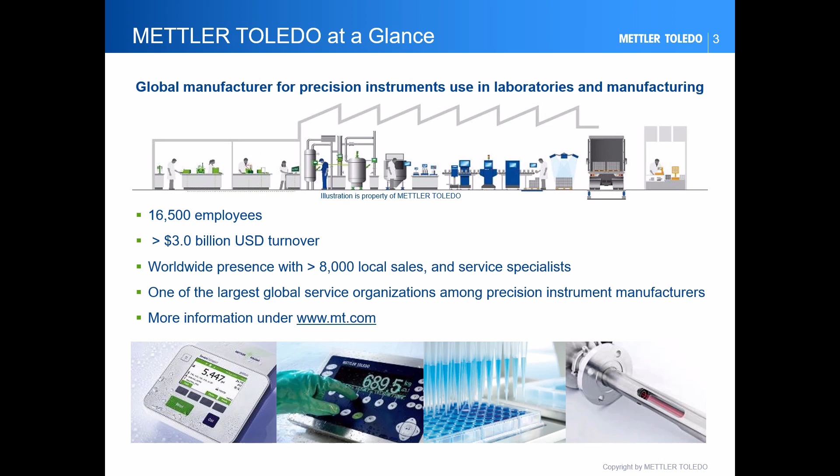In the traditional SCADA automation pyramid, data is consistently forwarded in a systematic step-by-step process following the hierarchy. Communication is via networks such as Profinet and Ethernet IP, but realistically also serial point-to-point connections such as RS-232 or even 4 to 20 milliamperes.

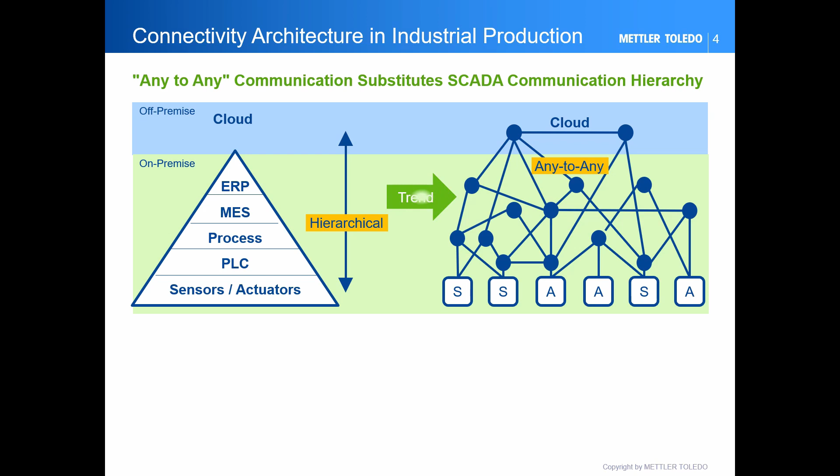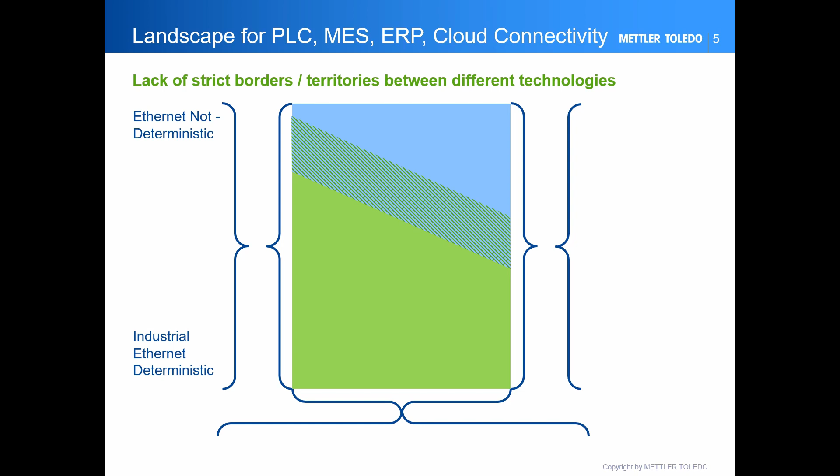On this graphic, you can see the distribution of the communication technologies. On the vertical axis, you see Ethernet not deterministic, and at the bottom, industrial Ethernet deterministic. On the horizontal axis, you see small data volume time critical, and on the right, large data volume non-time critical. On the right-hand side vertical axis, on top is MES ERP cloud, in the middle machine-to-machine control, and at the bottom sensor to machine and sensor to sensor, sensor to actuator.

The blue field here illustrates the territory of OPC UA and MQTT. The green surface here illustrates the territory of Profinet, Ethernet IP and other such technologies. In the middle, we have the mixed zone. In the mixed zones, both technology groups are being used. And who uses what depends on the industry, on the customers, and on the applications.

Here is the same graphic again. So, what kind of evolution can we expect? We will receive Ethernet time-sensitive networking. We will receive OPC UA PubSub. We will receive OPC UA field-level communication. And it will become common that multiple communication technologies share one network wire.

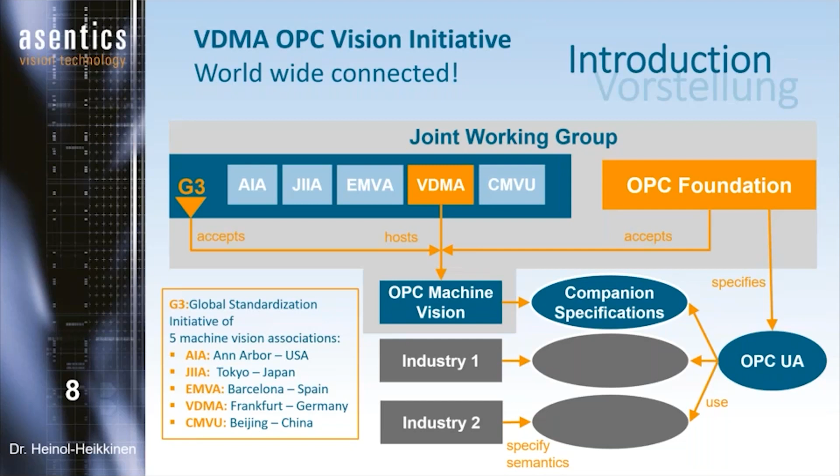And so they provide also information at all 3 continents. This is the reason we call it the G3, because we are talking about not 5 associations, but about 3 continents. So this is very special, and this is very helpful, because this is really a global standardization process, what we are doing there.

Maybe it could be an application with more than one computer, maybe 2 or 3, and 10 or 15 cameras. And this is also what we call a machine vision system. How to standardize that? So we have to find a way when we design our companion specifications to bring a standard for all those systems, not to have 4 different standards, to have one standard. So to have a generic description of a machine vision system.

Besides that, we have another problem. This is that we have enormous application variety. As you know, maybe some of you have had already contact with machine vision systems, and you know there are myriads of applications. So we have lots of different configurations, different results, and so on. It makes life not so easy if you talk about standardization.

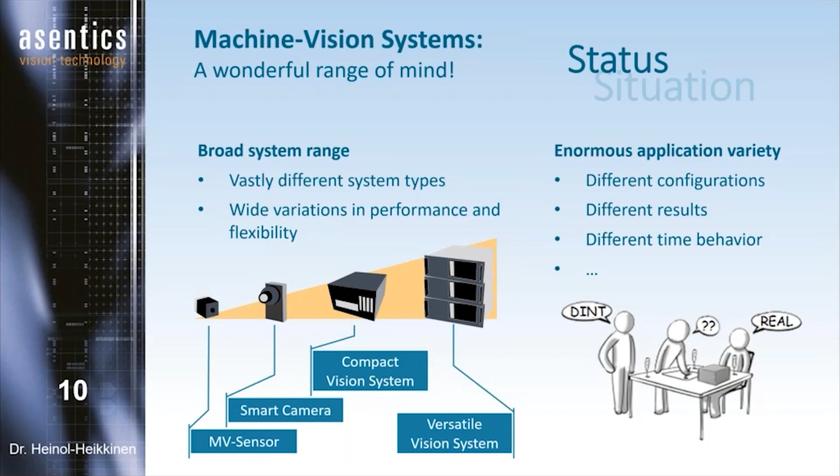But however, we bring out OPC companion specifications in 2 parts. So we started 2017 with the first part of our machine vision companion specification. It's called 40101. And what we did there is we standardized data management methods. That means we talk about how to deal with configuration, how to deal with recipes and results, and so on. But we standardize only the management methods, not the content. The content we standardized later on in part 2.

But in part 1, we also have a standard so-called state machine. That means we have a look at all those different kinds of machine vision systems at the behaviors, and the behavior control and the observation is standardized in a state machine, which you can use for a simple sensor and also for a huge machine vision system. So this is a very generic description of how a machine vision system behaves.

In part 2, we additionally describe a so-called asset model. That means a machine vision system is a computer, it's a light, and so on, and all those components are described. And also we say something about condition monitoring. So part 2 will be ready this year, 2021. I think in autumn we will reach the end of part 2. And of course, part 3 will come after part 2, that's for sure.

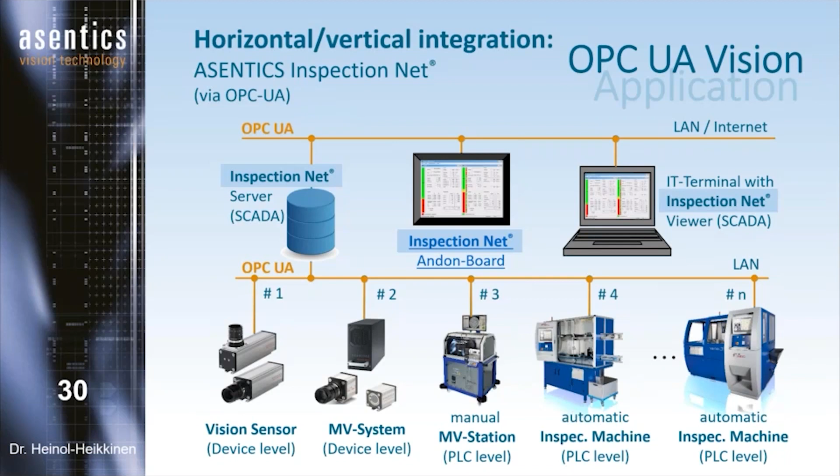And on the next slides, maybe this is also something you know already, but I would like to show that because it's very important for me to point out that even if you are not using a companion specification which is standardized by many other partners, you can, as we did, based on the OPC UA meta model, design your own OPC UA extensions. You can see that here in blue color.

So these are the Asentics extensions, because we have so much information from our machinery. And a standard machinery companion specification is not yet available. VDMA is working on that, but Asentics needed that already in the past, because it doesn't help so much if we have only communication based on a companion specification for all our machine vision sensors. We also need an extended communication level for the machine, because we have so much information about the health of the machine, the state of the machine, and so on. And you will find that on this slide.

And please keep in mind, this is very important, you still work with a standard because you're still working with OPC UA. And if VDMA delivers maybe in 1 or 2 years a companion specification for machinery, you can easily exchange your vendor-specific thing with the standard thing. So it's always allowed to do that. So you have a fully equipped information model, and you can talk to the outside world, even if you are not using a companion specification. But it's recommended, of course, to use the companion specs.

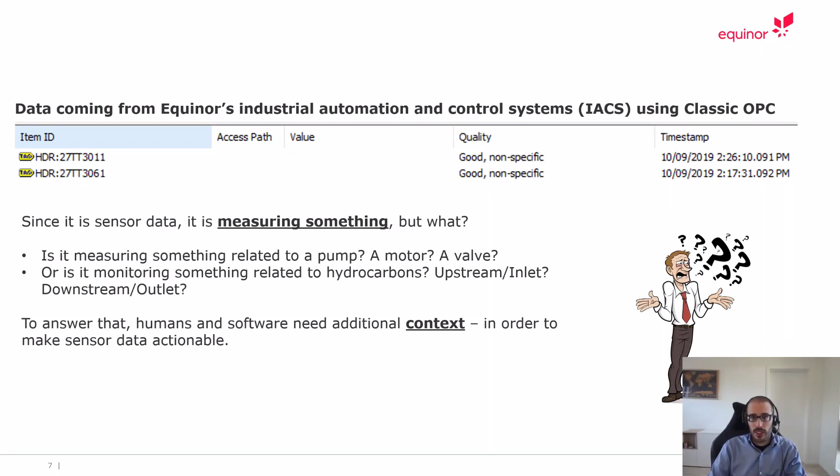So it's measuring what? Is it the valve? Is it the pump? Is it the motor? Is it the outlet temperature, inlet temperature? Is it upstream, downstream? So in order to answer this, we need to have context on this data.

So the most powerful game changer to obtain context is OPC UA. It has an ability to turn data into information, data in context, with the OPC UA information model framework. Its ability is to standardize on information across vendors and products using OPC UA companion specification. And this results in interoperability.

OPC UA is an open, international, industry-independent, and secure connectivity framework supporting Equinor in making real-time contextualized data, which is information, available. So this means that 2 out of the 4 pillars to become data-driven are already established. But to do this in scale and speed, we need interoperability. So it is important that we also have our vendors implementing OPC UA, so we can lift out the data from the bottom level until our Omnia in a much easier and much faster way.

So our plants, they are heterogeneous, meaning that we have many different vendors delivering software and hardware on the same plant and across plants. If each vendor is delivering the same type of data in different vendor and system-specific interfaces with vendor and system-specific information models and semantics, then humans or our engineers need to spend a lot of time interpreting this and mapping and transforming this.

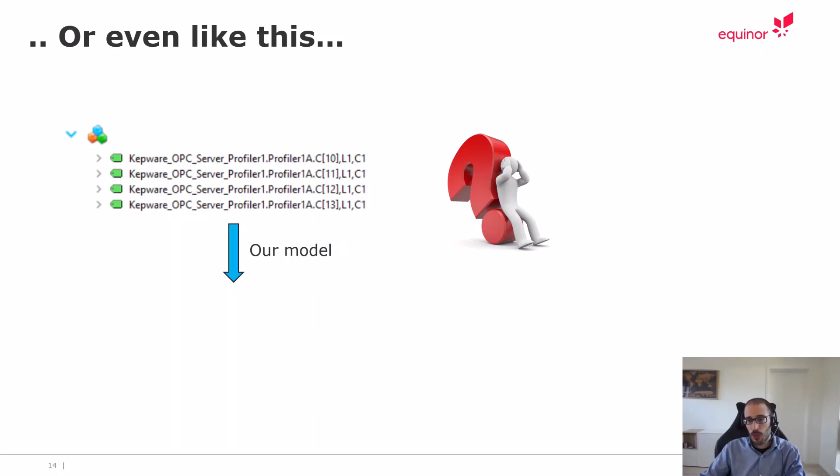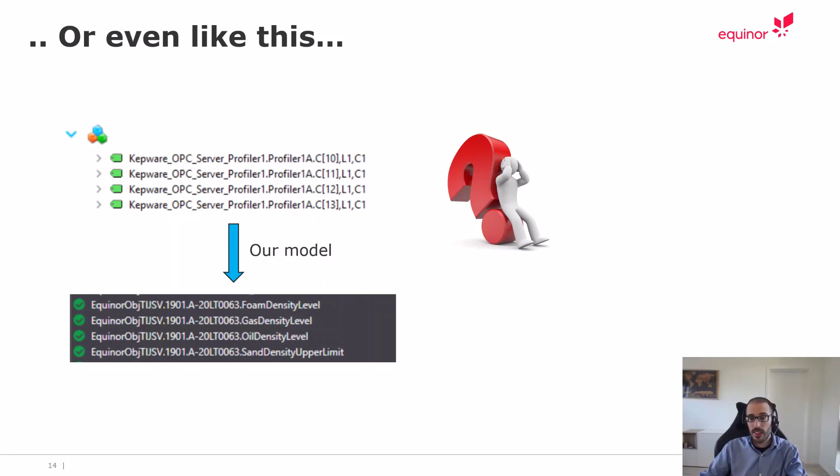This is another bad example. So for instance, when we browse a server with this kind of information, it's almost impossible to know what they're describing here. So in order to be able to transform this into something readable, we have to go through technical documents and we have to map it to something that is understandable. So we know that these first tags actually represent foam, gas, oil, and sand density levels.

So OPC UA has been implemented and proved in use at scale on Johan Sverdrup. This project started production in 2019. This field alone is massive. It produced 30% of Norway's total production. And OPC UA has been a central part of the digitalization strategy since 2015.

So we have in total 19 OPC UA servers on the plant floor, aggregated into a single OT/IT gateway using OPC UA aggregation architecture. So let's take a look at the architecture. If we start with the top right corner here, we have the OPC UA library. This OPC UA library contains the template of all the objects and types and classes that are defined for all the different equipment that we have in our system. And in here, we have the engineering database.

The engineering database contains all the equipment tag names from our database. So when we merge our library, which is a template that can be used in any project, with this database, we get a plant-specific mapper, meaning that in this case, Johan, we have combined all the types and all the objects with the library, and then we get automatically assigned types for all these equipments.

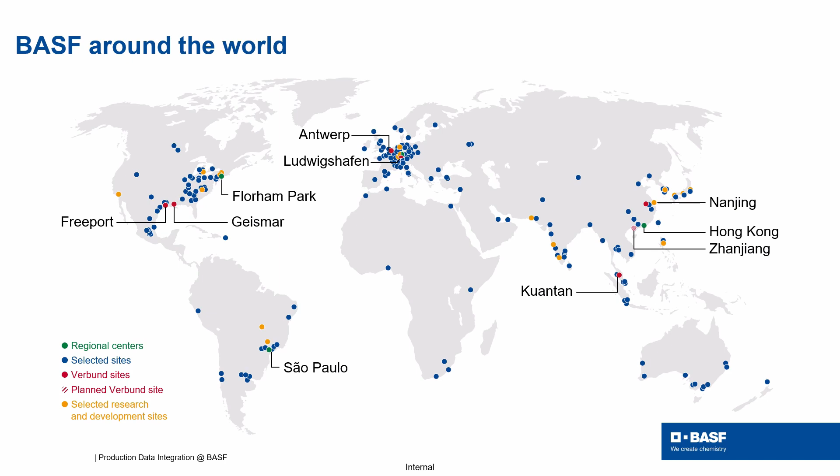This concept of the Verbund is something that you will find across the entire company, and it actually means a very deep integration. When we talk about the Verbund in terms of production, it means that we have the whole value chain on one physical location, and we have the products being made in plant A becoming the raw material for the next plant, and so on. And in the same way, we do a very deep integration of our utilities within these Verbund sites. And this we do similarly with our entire value chains, with our markets and customers, and even with technologies that we share across a whole wide range of segments.

And of course, in order to really capture the benefits and synergies of such a Verbund, you need digitalization to be able to harvest these advantages. So the key question now becomes how to enable digitalization. And given the name of this talk or of this session, it's not a big surprise that the answer is through data. And then the question is, okay, so how do we integrate this production data?

Well, in the recent past, that looked more or less like this. We had our plants, which had a control system and also a functional safety system. And some 15 or 20 years ago, we realized that it would make sense to capture the data of these control systems in databases or historians, and that's when we introduced the production information management systems, which were then used by people making some simple calculations and dashboards.

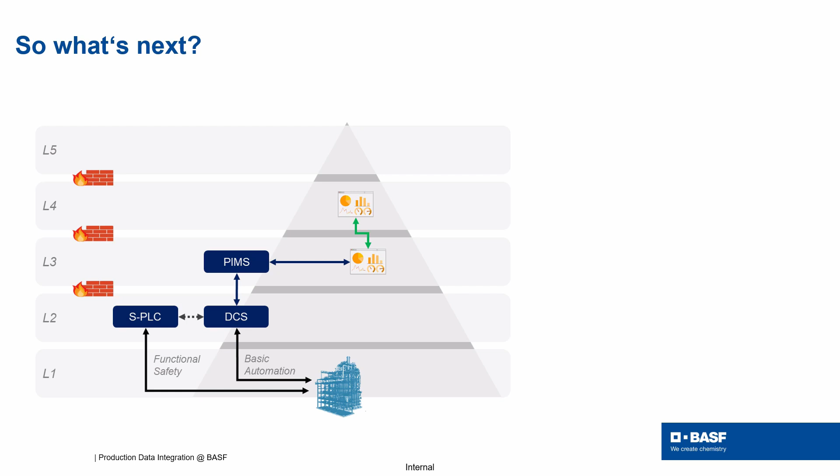Looking at the current status at BASF, I would say that we have managed this complexity and we've been able to integrate hundreds of plants on a global level, and we're using this data for all kinds of applications. But the question is, of course, what's next? And we have seen a lot of innovation in the last years with mobile devices, Internet of Things, and the introduction of the cloud, where we have new possibilities with big data, machine learning, artificial intelligence, which enables us to explore new service and business models, get better intelligence and insights into our plants. And the question is, of course, how we can leverage these kinds of benefits.

And so we as BASF, we are looking at how we can leverage this kind of innovation while keeping everything that's good within the automation pyramid, because we have systems here that will still run for the next 10 years, but combining that with all the new chances coming through cloud and IoT. And what we're proposing is the NAMUR Open Architecture, which is an initiative strongly driven by NAMUR, the user association of automation technology in process industries. And we see NOA as the fast lane for all non-core process control relevant data.

And how could this work in practice? Well, the IoT sensor that we would use to retrofit the plant, while it's physically inside the plant, it has actually logically nothing to do with the control network, because we don't use that to control the plant. We only use that for additional monitoring and optimization. So it actually makes complete sense from a network point of view to separate that from the control network and to use that directly within the fast lane and make sure that you can integrate that data as soon and as easily as possible.

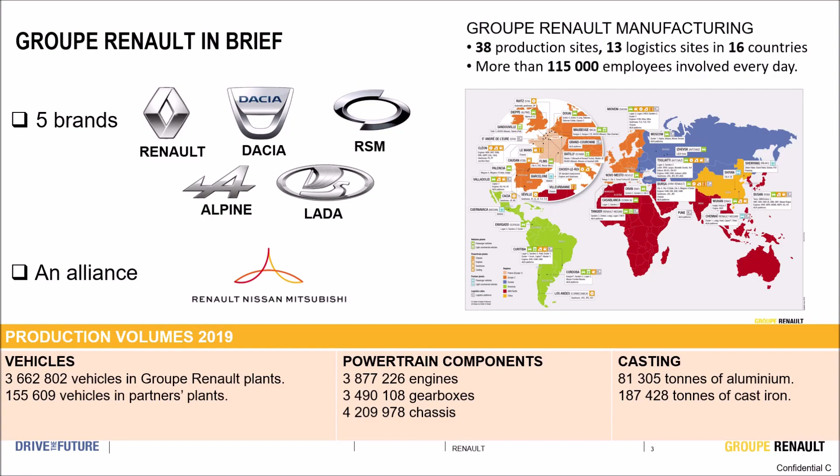In 2016, Renault launched numerous digital initiatives in a benchmark factory in Spain. From this experience, in 2017, we launched many digital transformation projects. These projects revolved around 5 major pillars: real-time data-driven operation, full track and trace, flexible supply chain and plant, process 4.0, and connected workforce. The subject that I will detail in my presentation lays the foundation for several transversal subjects.

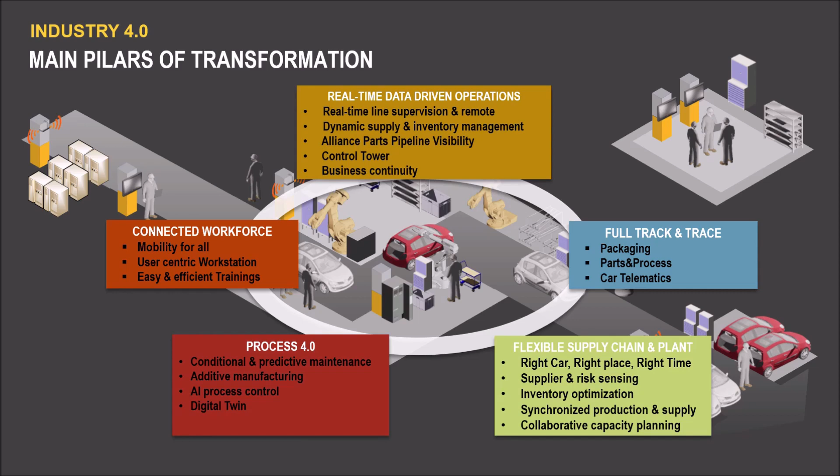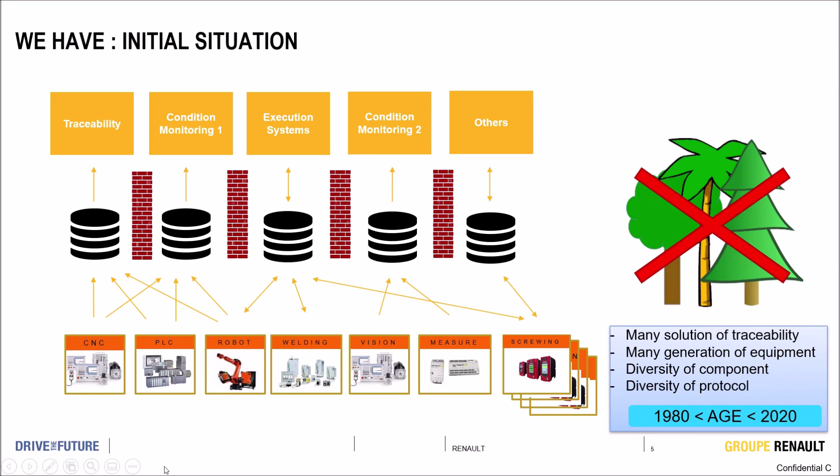Regarding the subject of industrial data, over time we have accumulated numerous technical solutions which have partitioned the data by typology. Allow me to illustrate my remark with several examples. An example on traceability in powertrain plants: an Atlas Copco system where we have Atlas tightening controllers, and for conditional based maintenance of robots, we have a specific system per brand. If we talk about automated installations, we have installations from the 1980s to today and significant diversity of automation and protocol components. Each of the technical solutions has its own architecture, and when we try to mesh data, it is very complicated.

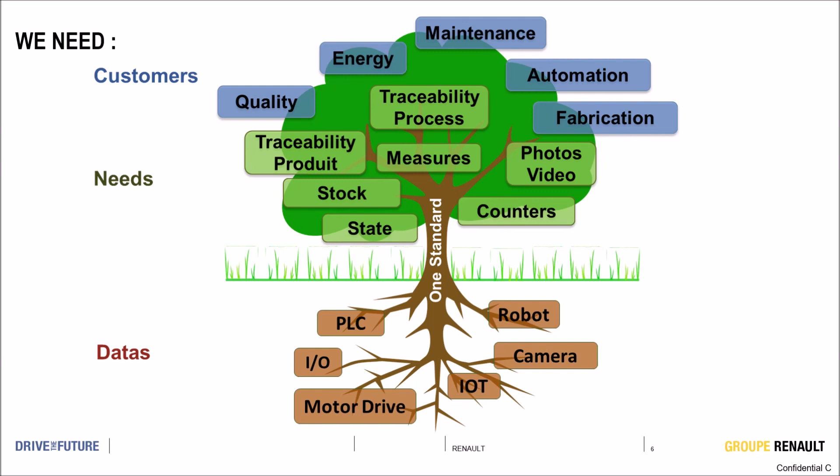When we look at industrial installations, we have a lot of data from industrial equipment such as PLCs, input/output, Booleans, robots, vision systems, variable speed drives. If we look at the functional need, we need answers on product traceability, process traceability, measures, state of stock, photo, and video. For end customers, we see that data is of interest to many businesses in the company: quality, energy consumption, maintenance, automation, and manufacturing. To meet these multiple needs, we have defined a standard for data capture, and we have a strong slogan that is spread throughout the company with a common target: collect once and use many.

For the capture of industrial data, there are two essential layers: the industrial repository layer, where we have defined the data model and the single publication table; and the data acquisition layer, where we collect structured data from different industrial equipment. The conditions for this digital transformation to succeed: the common data dictionary, the unified information structure, the granularity of the data for a maximum of use cases, a worldwide standard, a common automation and IT approach.

To meet these conditions, we have chosen the OPC UA technology with the data model approach. This element will make it possible to meet the challenge of the factory of the future, where we have unified data capture, interoperability, machine-to-machine communication, edge, cloud, and big data, machine learning, artificial intelligence, and digital twin.

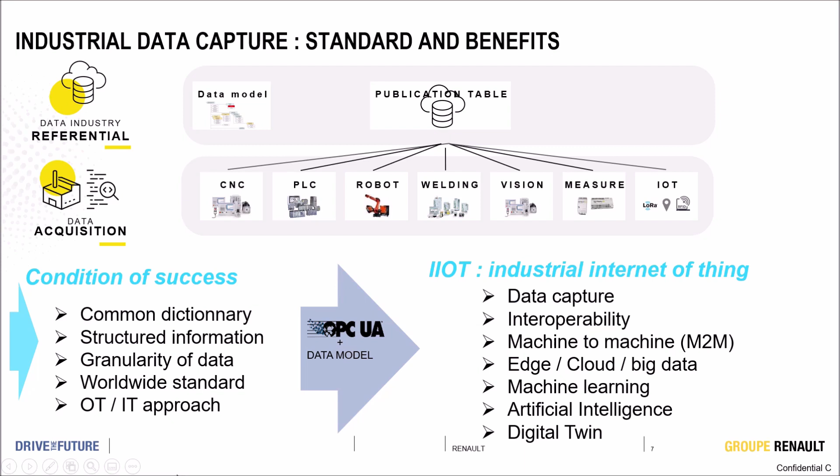Here is a quick overview of the architecture implemented with 3 levels. A first level at machine level, where we have implemented a software we call UDC for Unified Data Collector. This software transforms all proprietary protocols into OPC UA with a structured data model.

A second level at the factory level, where we have implemented a software we call DFA for Data Flow Aggregator, where we aggregate factory data to send them to the internal cloud until mid-2020 and Google Cloud Platform since that date.

Some interesting data on the capture of industrial data: 3,300 devices deployed in OPC UA, 300 billion data collected since the start of the project, data from 17 factories representing a flow of 10,000 messages per second. We use OPC UA technology for Industry 4.0. From Industry 4.0, we have more than 1 million measuring points. We collect different forms of data: Boolean, string, analog value, table, file, and image.

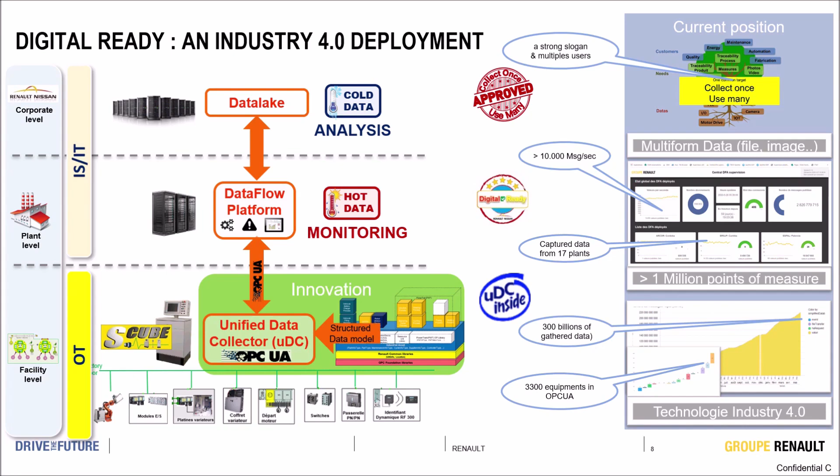The organization we have to implement all the fundamentals of the data capture project: a team dedicated to the data model, made up of a multidisciplinary group from OT, ISIT, and process engineering, which has already made 40 data models for the powertrain plant, 10 data models for the vehicle plant, with a target of creating 200 data models.

A team dedicated to software development with 4 fundamental building bricks: Magic Draw for data model, UDC for industrial equipment, DFA for aggregation, and Google Cloud Platform for the publication table. The target is to be plug and work. A deployment team made up of factory and corporate automation engineers to implement the UDC in industrial facilities.

We first deployed 100 pieces of equipment in 2018, 900 in 2019, and 2,000 in 2020. The current target is to deploy on a large scale. An OT and ISIT monitoring team to monitor the performance of the complete flow. We have added additional information in the data feed to qualify the end-to-end performance, and we have a real-time dashboard to see all the events. The target is to have an incident rate below 0.5%.

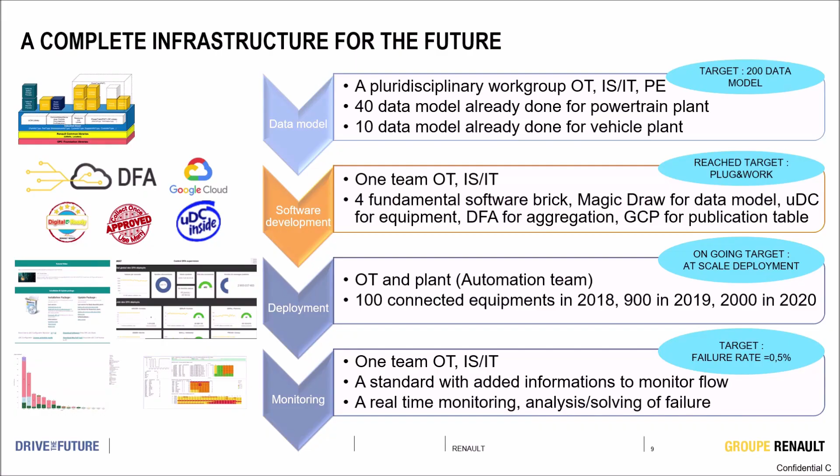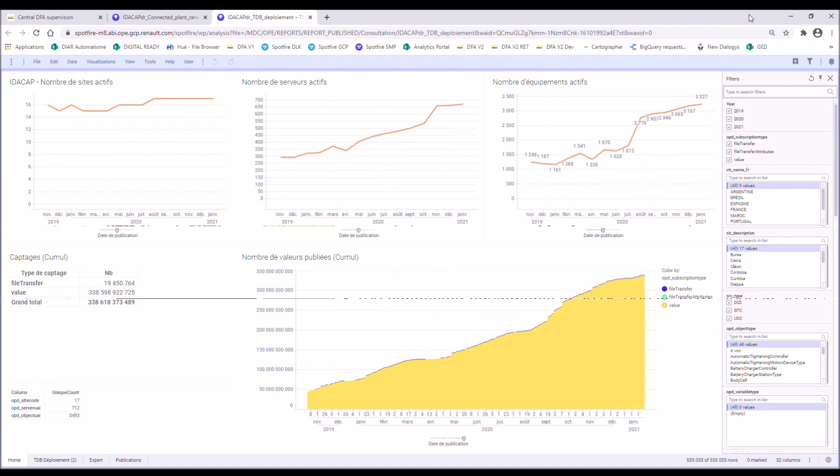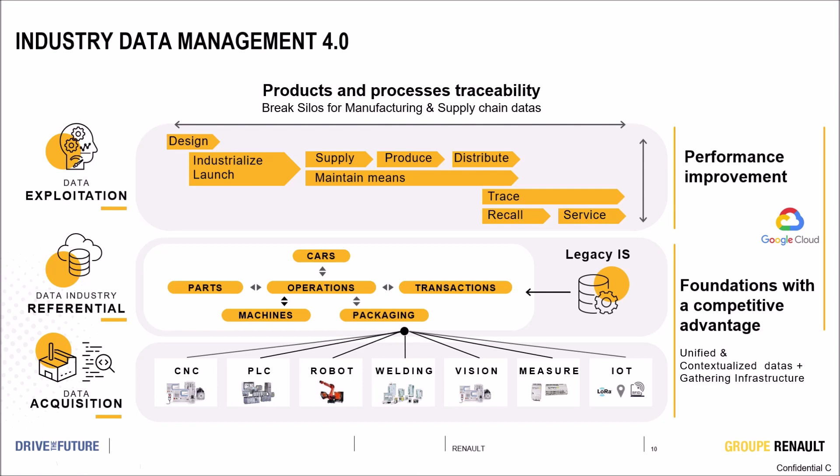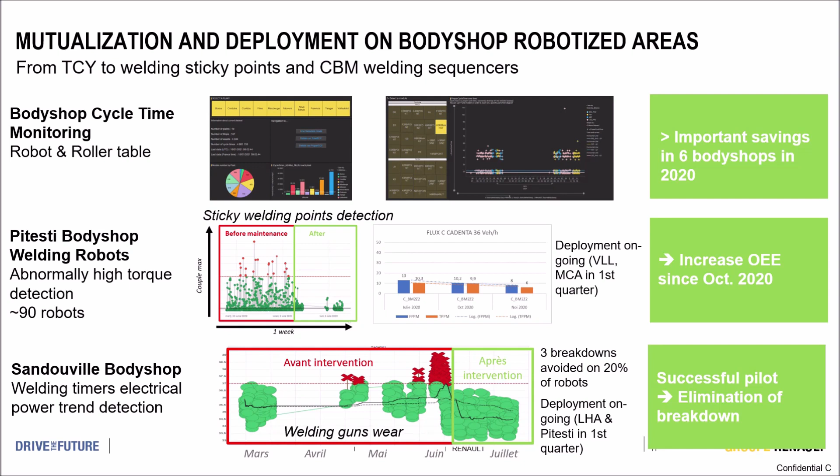The second concerns the detection of sticky points on welding guns and relies on the collection of torque and position information from the robot and vehicle information from the PLC. The third concerns the monitoring of parameters in the welding controller, where we seek to identify the drift of physical quantities to anticipate breakdowns on welding guns. This made it possible to reduce the maintenance workforce. There is no longer any need to manually measure the resistance of the welding gun every week.

To end this presentation, we would like to present our vision of the world of industrial data. Our dream is to implement OPC UA from machine to cloud. As the data is structured in the machine, it can be used by all IT systems, from the dashboard, MES, ERP, or the cloud. This will ensure bidirectional communication without modification and without development. We imagine an ideal world where the data will circulate without modification, only with configuration.

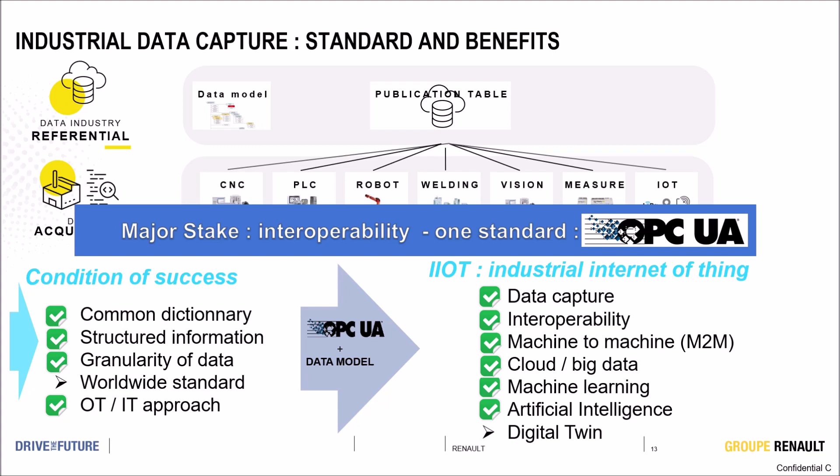For the long term, we believe that car manufacturers should work together to share a unified data model to avoid work at our machine suppliers. From structured information, it is conceivable to have a rapid deployment of artificial intelligence and machine learning, and Google will help us to achieve it. In conclusion, we believe interoperability is a key part of the factory of the future. Groupe Renault has chosen OPC UA technology to achieve this. Thank you very much for your attention.

Thank you so much. Fantastic presentation. And as you have seen, not only Microsoft, as before with the Equinor success story, now it has been Google Cloud with Renault. A fantastic success story from France, and now we are moving to South Germany, to BMW, and we hear another success story. I think this time it's again Microsoft. So let's listen to Dr. Backhaus.

Hello, ladies and gentlemen. This is Dr. Backhaus from BMW. Thanks for joining today's talk about OPC UA at the BMW Group. I would like to focus on edge computing and OPC UA as a success factor for future manufacturing. As you can imagine, I would really love to talk about cars, but today's talk unfortunately is not about cars. It's about leveraging edge computing and OPC UA for our future production systems.

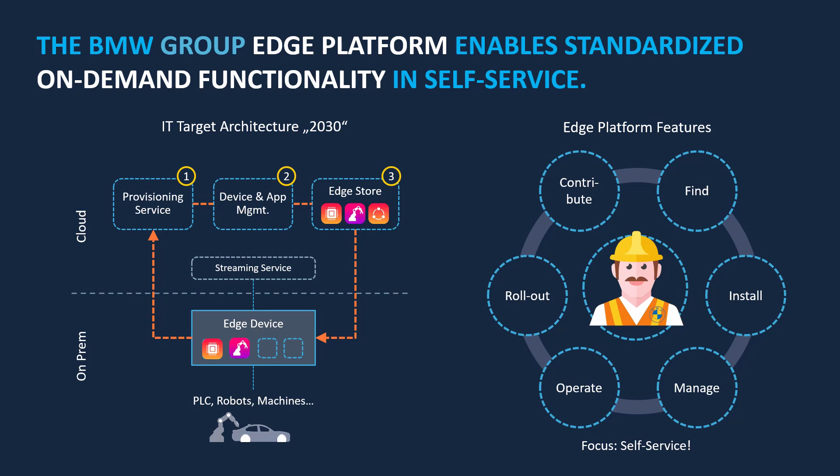The main benefits for us in that case: we focus here on standardization. So all these applications are packed in Docker containers with central IT policies. As I already told, contribution from different departments is possible. We're focusing on a hybrid approach, so that edge device could be an industrial PC directly sitting at a production line, but it also could be an on-prem data center, so on a higher level. And also with that platform, we are enforcing security functionalities like container checks or device policies.

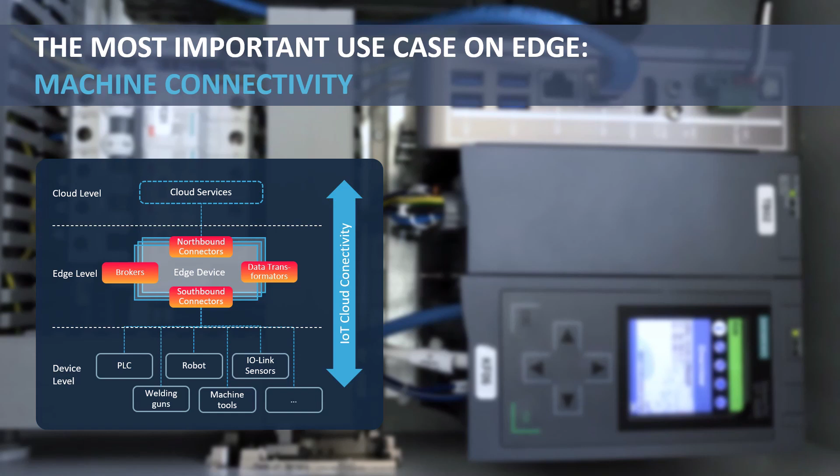But of course, the most important use case on the edge is machine connectivity. So not only southbound connectors, where OPC UA is our main focus, but of course also data transformations, and then providing the data northbound to other cloud services or the streaming services in our case. And we're focusing on OPC UA.

I would also like to introduce the main phases of what we've done in the past and right now. First of all, in the first step, you have to establish OPC UA as a standard for new equipment. That started with some tests in our production sites. And so all new equipment is at least OPC UA ready, has an OPC UA server on board, and can be integrated in the future into new applications.

Then during operation and building of cars, OPC UA works well together with our edge functionalities. With OPC UA as a standard, centrally managed rollout and changes in the data access are easily possible. Also for business departments, for example for failure analysis, flexible and ad hoc data access is really a key success factor. But of course also for the integration of new IT applications, the common interfaces and companion specifications which OPC UA provides are a big help.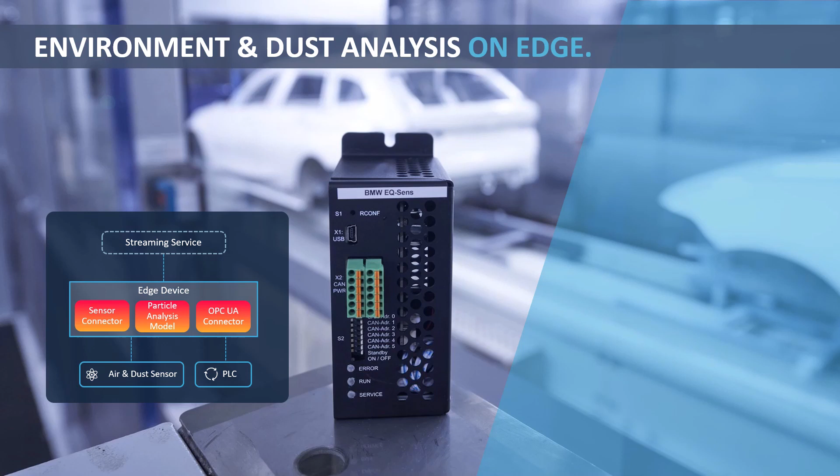Yeah, we're not only doing that on our own, we're also doing that in a community. That's why we founded, together with the colleagues from Microsoft, the Open Manufacturing Platform. After that, a lot of other companies joined us, as you can see here on the logos. Currently, we're working in different working groups, for example, reference architecture, semantic data structuring, or autonomous transport system core services, but also on IoT connectivity.

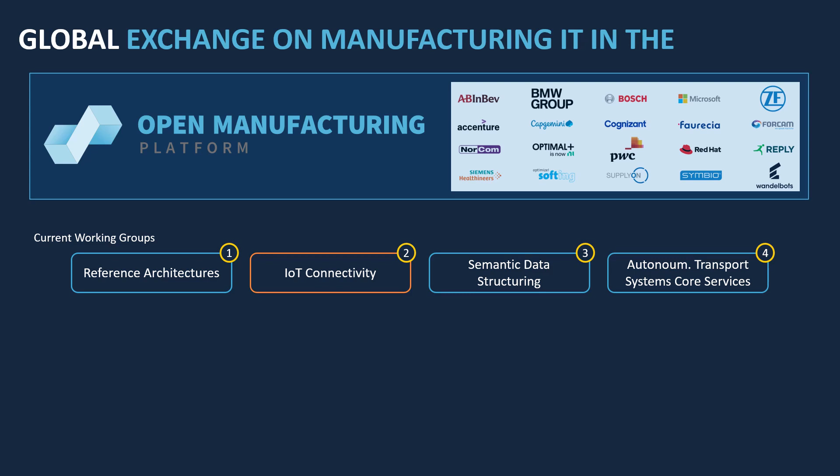And IoT connectivity focuses on, of course, some architecture discussion, the sharing of know-how and best practices, but the main focus is developing code together and providing it as open source. And all that is also based on OPC UA as a common standard there.

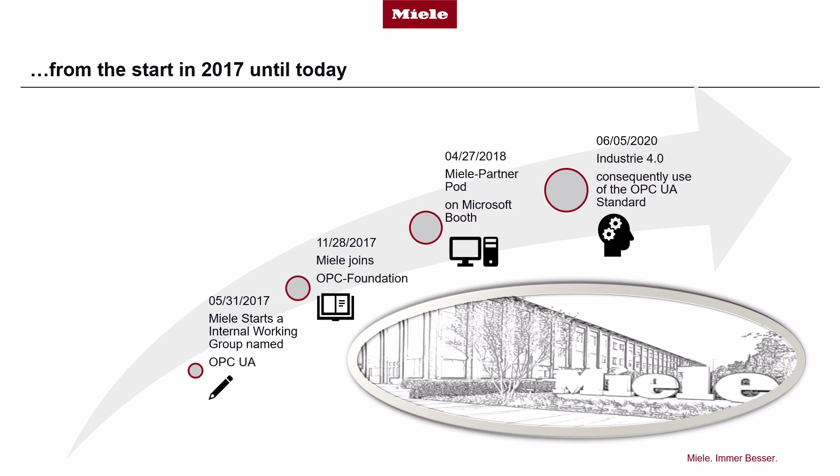Now I will show you important milestones of our cooperation with OPC UA that started in 2017. Right from the start of our cooperation, we set up an internal working group including all our plants. In the focus were our machines that produce our products. The working group decided that we will use the OPC standard in our facilities consistently in the future, certainly where it makes sense.

Now, a few years later, we have worked out blueprints that we are going to extend permanently. In these processes, generated data are grouped and qualified on an ongoing basis. Thus, we build the base for communication, for example, to connect safely and securely, maybe up to the cloud.

In 2017, Miele became a member of the OPC Foundation. My special thanks to Stefan Hoppe for his helpful support. A decision we have not regretted until today.

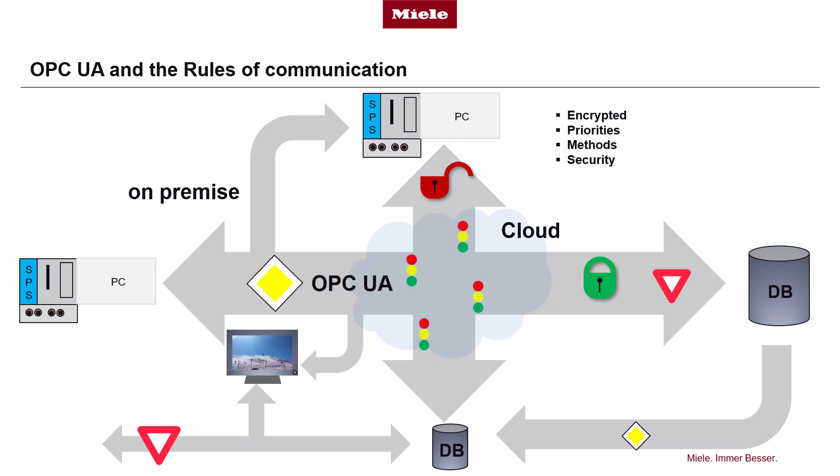In the past, the office application and the industrial world were strictly separated. Today, we bring the best of both worlds together. That was the overriding task in summer 2020 during our company holidays, when production was shut down, except maintenance work. The challenge was to remove the existing hardware and software of our press center, to install new devices and test them under real conditions, using of course a new communication layer based on OPC UA.

Additionally, not all PLCs were ready for OPC UA. That means PLCs had to be converted. A failsafe bypass had to be installed too. All that in a short time span of 3 weeks. This was a hard bit of work, particularly considering the fact that production had to continue safely after that.

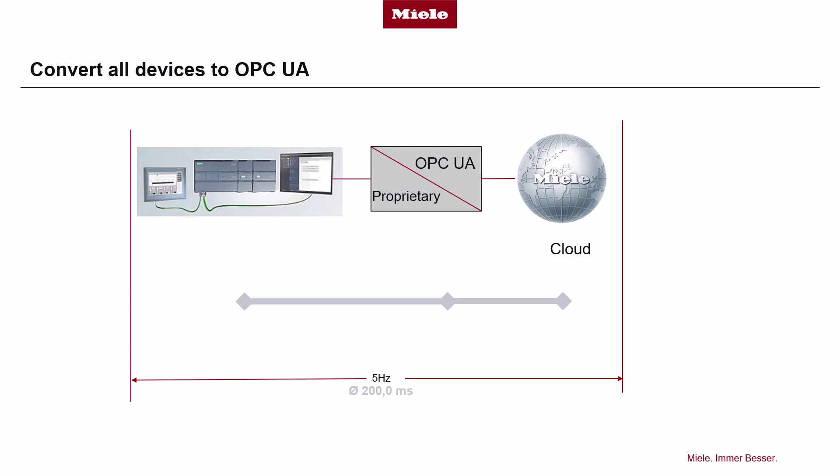Advanced data analytics was the biggest part. To combine process knowledge with data science is very difficult, not only for technical reasons. We are not talking about rocket science here. But there are many pitfalls when you want to adapt modern communication technology to historically grown production facilities.

Step by step, we are scaling even more in OPC UA. The background for this is to minimize tasks for the suppliers. Right now, we are evaluating a method and information platform, a central unit where all clients can get answers to their questions. A typical question is, here is my quantity, what is my OEE? And here it is. More questions can be answered with more extended methods on the platform. A central useful storage of methods.

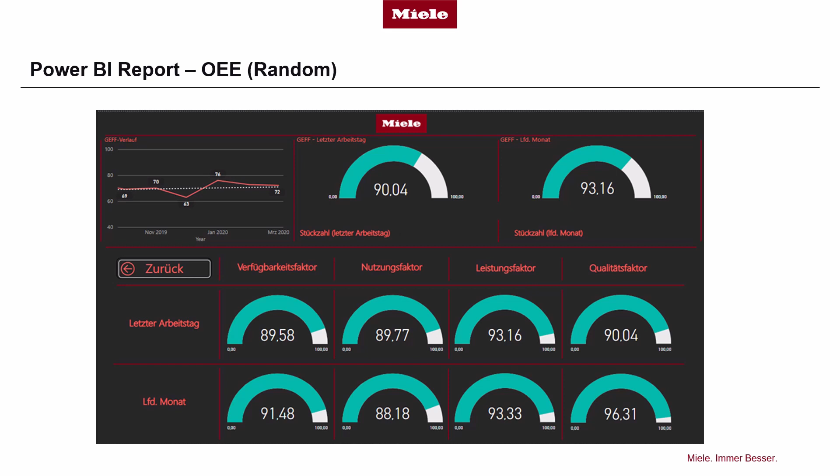Last but not least, we need security. It is indispensable when we talk about global networking, for example, connecting plants to the cloud for service reasons. With OPC UA, we get an encrypted, solid communication.

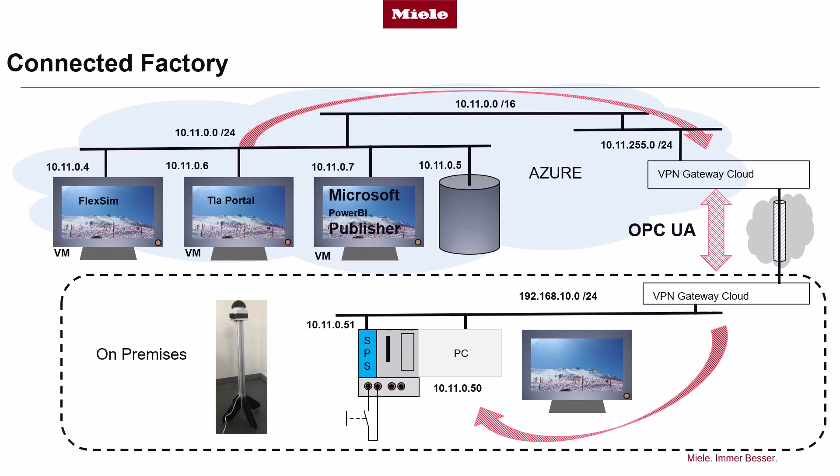We are well positioned for future requirements. Miele, OPC UA and the OPC Foundation is a success story, and it will be continued. True to our Miele claim, immer besser.